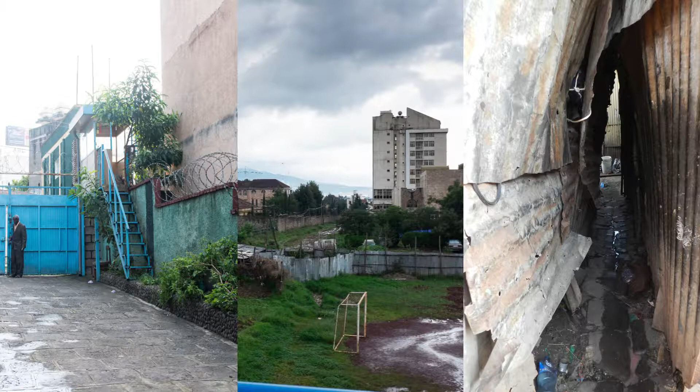In the context of a rapidly urbanizing world, Streetscape Territories investigates the transformation of our cities and how architectural and urban interventions can make for diverse and tolerant streetscapes, so that they can be sustainable environments for their inhabitants. We look into how these streetscapes can be appropriated by the inhabitants, how they can be manifestations of both social and productive encounters. Property structure, open spaces, architecture, accessibility, and permeability play key roles in what these streetscapes mean for people living in them.

Besides more developed contexts like New York and Brussels, Mercato in Addis Ababa is part of a bigger focus on understanding developing contexts. Within Addis Ababa, the political center of Africa and a city of more than 3 million inhabitants, Mercato employs around 13,000 people in one of the largest open markets in Africa.

In order to read the structures and complexities that come with this scale, clear parameters and methodologies structure the research. The first stage of fieldwork focused on 3 major themes: motion, edges, and program. The 3 themes served to pinpoint a specific situation for collectivity and defined areas within Mercato that displayed potentials and challenges.

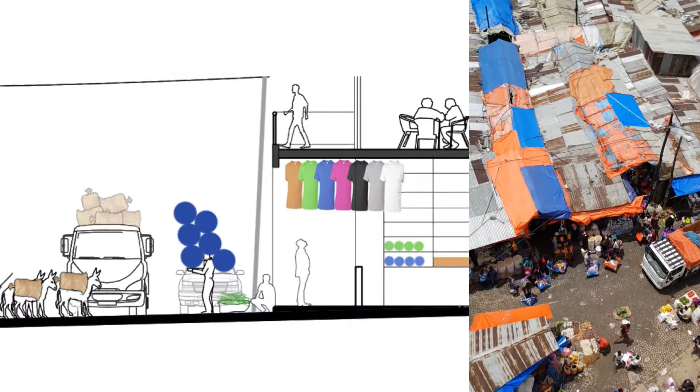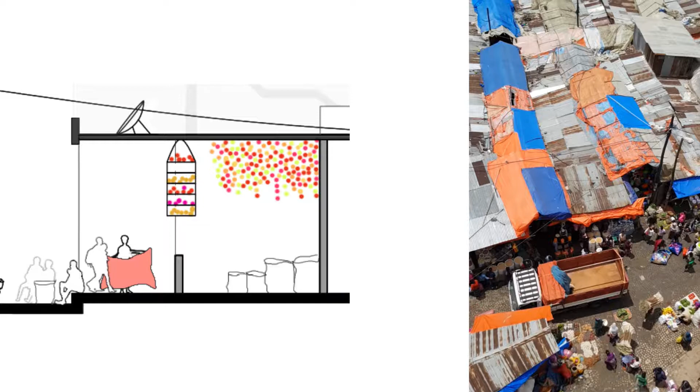Edges were studied by means of porosity, axis, and massing. Different configurations and uses were analyzed to understand the workings of boundaries within the market. Challenges that arose were the limitations of access that occur when shops or other activities extend their business to the street, and limiting porosity that results in newly established main corridors. Potentials include activation and appropriation of edges, which are created by a difference in configuration, typology, or floor material.

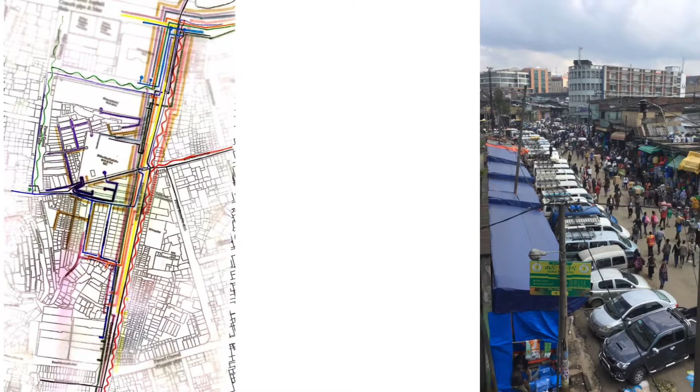Motions of all kinds were mapped to understand movements of every actor in Mercato and its impacts on architecture and infrastructure. The main challenge found here is the concentration of activities in the Minalish Terra, where the chain of production, storage, and sales are in one place. The contrast lies within the more recent mall area nearby, where these units are decentralized. A potential is translating horizontal activities, such as the production chain, to a vertical typology, such as the nearby mall.

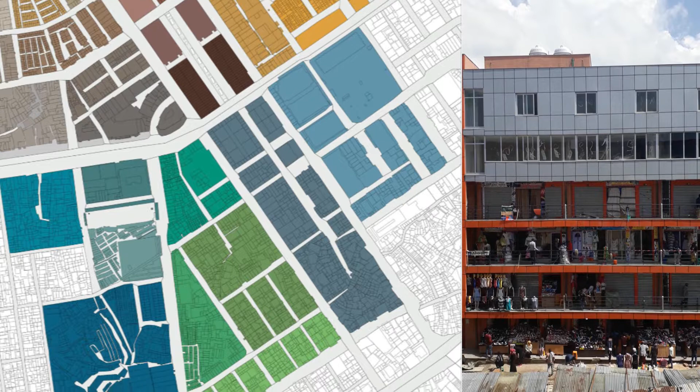Goods sold in Mercato are traditionally grouped in defined terras. It still allows for intermediate spaces where programs are flexible, interchangeable, and overlapping. Malls challenge the existing fabric by disrupting groups of similar, interdependent activities within a single terra, which causes inefficient logistics and difficulties in attracting customers. Both typologies of mall and smaller-scale shops show potential in the multiplicity of activities that are all interdependent.

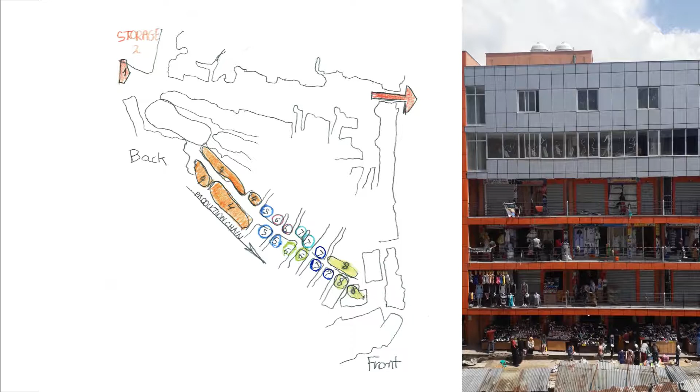The 3 themes serve to pinpoint a specific situation for collectivity and define areas within Mercato that display potentials and challenges. After reading the situation on site and identifying potentials and challenges, we started developing strategies for a sustainable development of Mercato. The strategies are divided into 6 themes: program, building, infrastructure, mobility, access, and services.

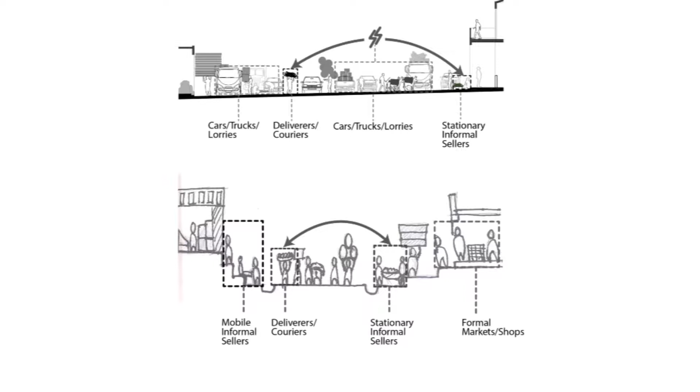Program: within the program, everyone should be welcome. We see maintaining the presence of different actors of Mercato as a potential for the different markets on the street. A proper additional storage floor can save area on the ground floor, which can be used to expand businesses.

A building could be organized around the Mercato process. The inner part could be used for production and storage, while the final products could be displayed on the most visible areas on the main street.

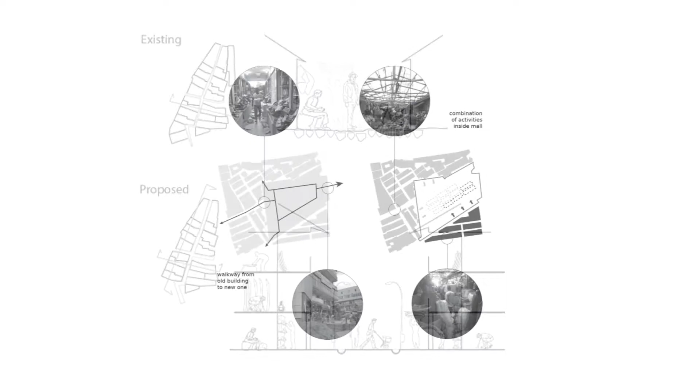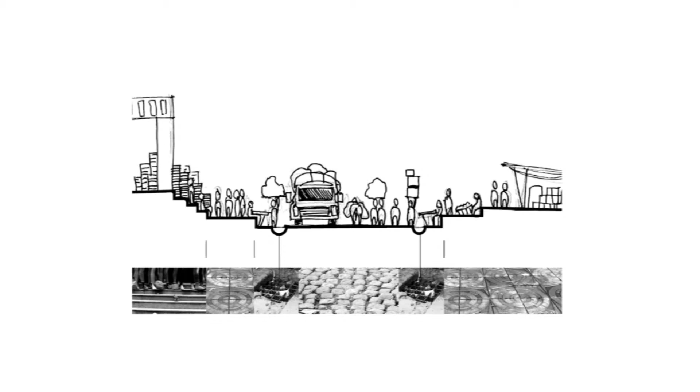A new mall and the surrounding tera can help each other. The surrounding teras can continue through the ground floor of the mall. This way, the mall can attract people to the tera. If there are different types of labor and services grouped together, keeping them close to each other increases productivity and efficiency.

Different materials, where to pave or not, placing steps and water drainage would influence the activities taking place on the sidewalks. Building entrances of the mall should be placed according to the existing street, so that existing streets continue into the mall. Even if malls have one front facade, the others are just as important.

Spaces between the malls can be used for informal structures, so access should be provided from all sides through staircases and ramps. Different functions need different floor heights. Workshops, for example, need high ceilings. Split levels and ramps should be considered to improve circulation in the malls.

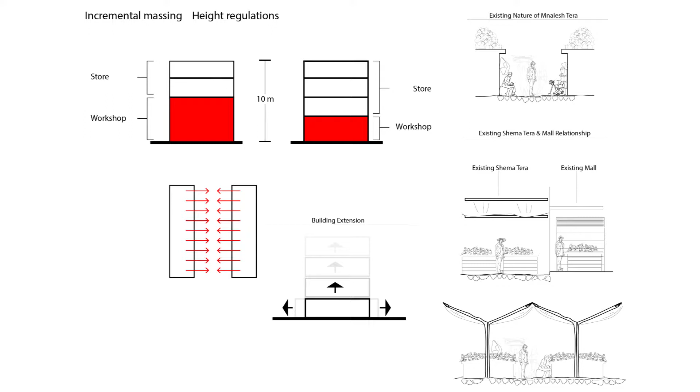Working spaces inside a mall or a productive area should be accessible from a different side than the customer accesses. A building is not going to last forever. We should consider making informal expansions possible.

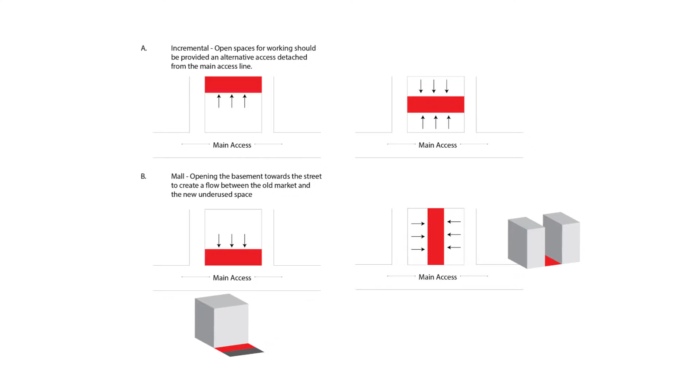Access. Limiting the deliveries of goods to the shops to the early morning and evening will keep the trucks out of the streets and make movements easier during the day.

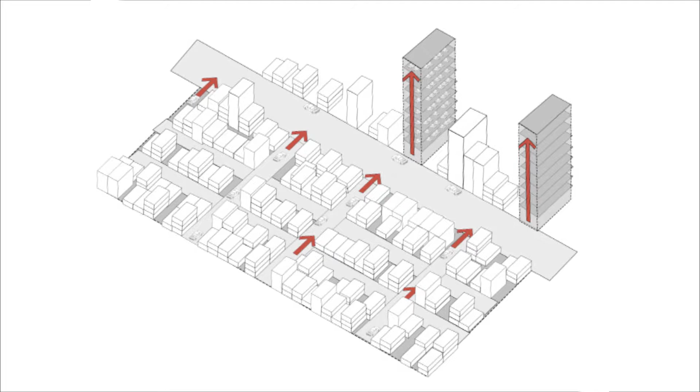To prevent congestion and provide more area for activities within the market, parking should be located in designated zones or buildings outside the market area. Loading and unloading areas for goods and drop-off zones for public transport should be specified.

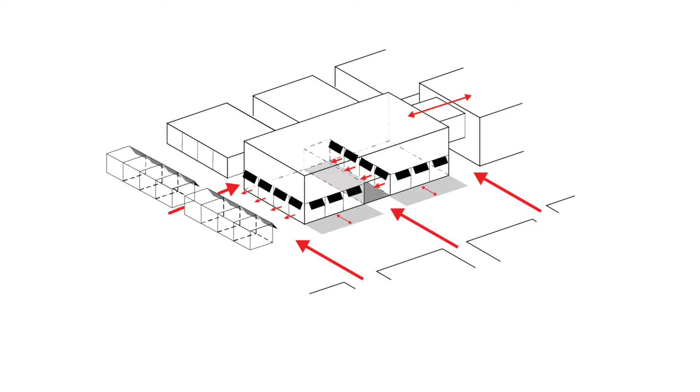Shops do not finish at the entrance. A better connection between the internal and external spaces would lead to increased access and usage. The streets can be designed to allow for shops to extend outwards, as long as they do not limit the circulation too much. Gaps will improve access and visibility for shops that are not located on the street.

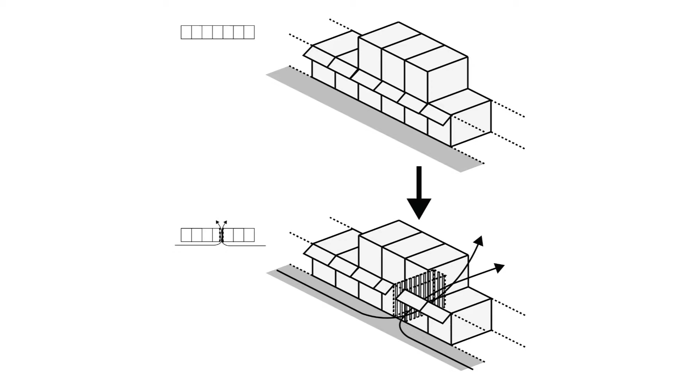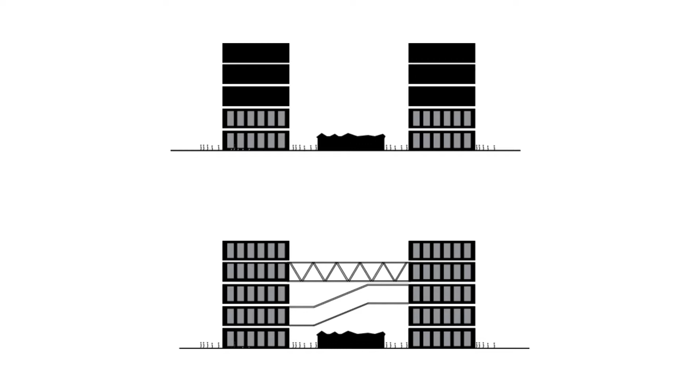Connecting the malls with bridges will improve connectivity and reduce the need for vertical movement. Instead of building back-to-back shops, creating a joint shop could eliminate the wasted space between buildings and make the transportation of goods and movement of customers easier.

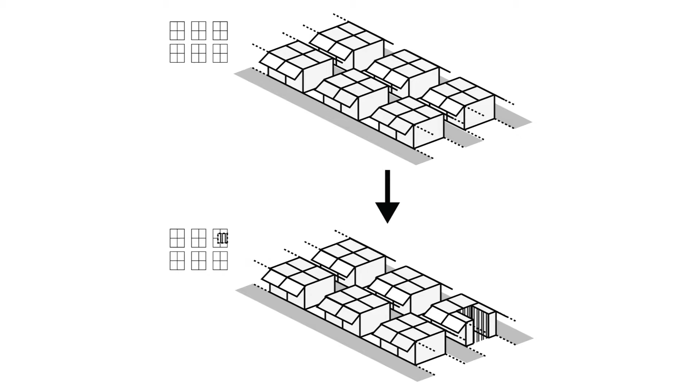Some areas could be separated from the public space of the street, creating dedicated zones for loading and unloading of goods.

Mobility. Motor vehicles should only access the wider main roads. Placing production, sales, and storage closer to each other would reduce the need for transportation within the market.

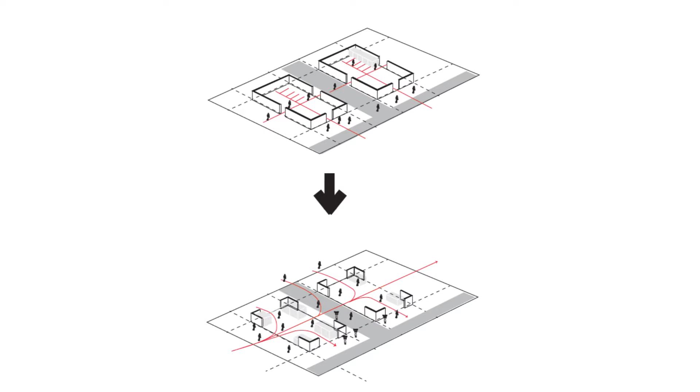Lots of openings at the ground floor would make it possible to easily move through the market. Restricting deliveries to early mornings and late evenings would make it faster, and the streets will be less crowded during the day.

Services. Renting out the lift to an agency to maintain and collect money from the users can generate a profit.

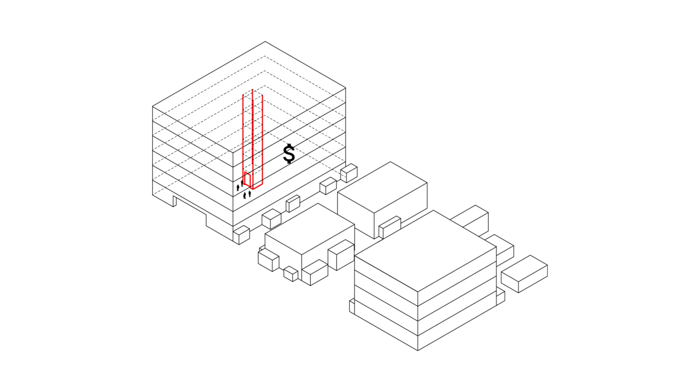A fixed percentage of the revenue generated by the land lease for a new mall should be used by the public authorities to maintain and introduce public facilities in an area within 500 meters from the new building.

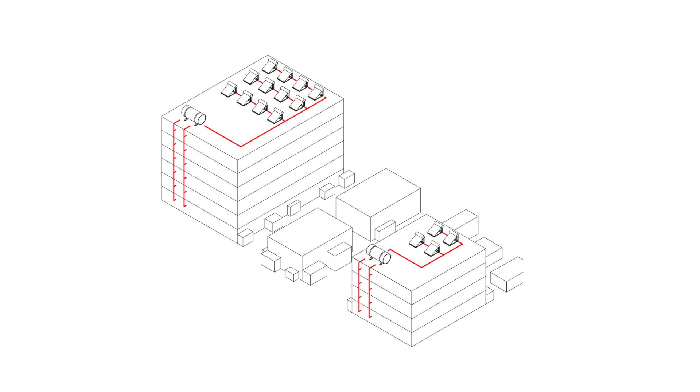Infrastructure. Solar panels can be installed on the uppermost level of a mall to generate electricity for consumption. Excess power can be shared with the grid and generate revenue.

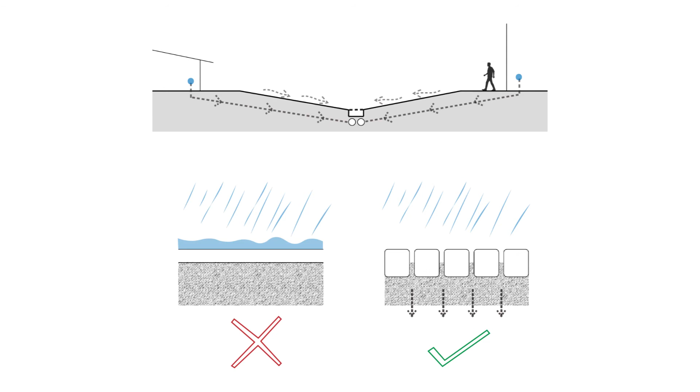The streets should be preferably paved with stones instead of asphalt. This will allow some rainwater to flow into the ground and reduce the risk of flooding. The simple placement of a drainage channel into the road section will reduce the need for expensive infrastructure works.

With these strategies, EIABC and KU Leuven hope to, in collaboration with the stakeholders, work towards a sustainable development of Mercato.